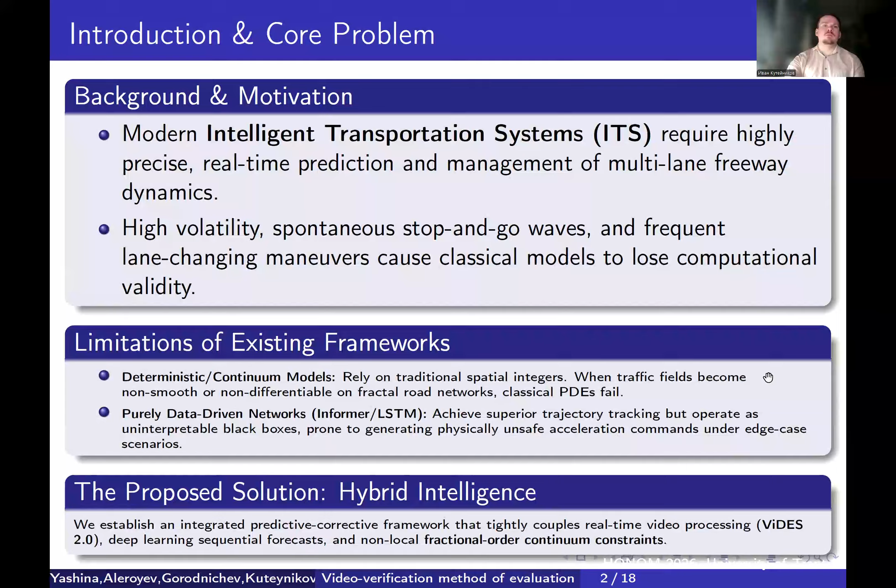On one hand, integer-order continuum frameworks assume continuous, perfectly smooth traffic fields. When deployed on fractal road infrastructures, they fail due to massive numerical truncation errors. On the other hand, purely data-driven black box models, like long short-term memory networks, achieve strong tracking accuracy, but lack physical interpretability. Under critical boundary scenarios, these deep learning systems are prone to projecting anomalous, physically dangerous acceleration commands. To resolve this conflict, we introduce a predictive corrective hybrid intelligence framework.

This slide illustrates the structural pipeline of our hybrid intelligence model. The entire operational loop executes within a strict sliding 10-second observation window, updated continuously at each discrete interval of 0.1 seconds. The architecture consists of three distinct phases. In phase 1, our virtual detector system ViDES 2.0 analyzes raw digital video streams to extract real-time macro-scale variables, specifically traffic density, intensity, and velocity.

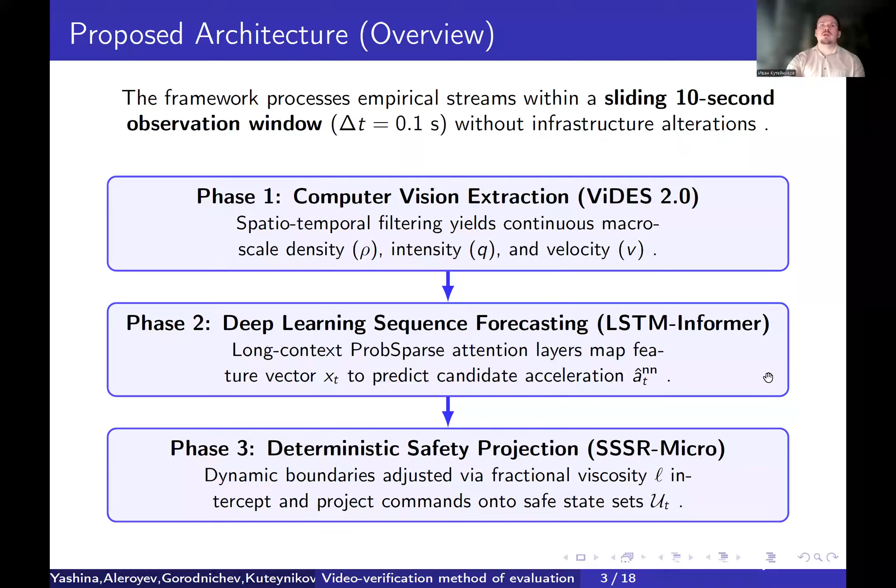In phase 2, these continuous parameters form a sequential state vector that feeds into a long context deep learning layer, combining bidirectional long short-term memory hidden passes and Informer sparse self-attention blocks to predict an unconstrained candidate acceleration value. Finally, in phase 3, a deterministic supervisor monitors this candidate output. If an anomaly or high-risk state is detected, the supervisor mathematically intercepts the command and projects it into a convex safe set governed by a macroscopic SSSR micro framework, which is dynamically calibrated using fractional cross-lane viscosity constraints.

First, an L1 matrix norm quantifies the absolute pixel intensity average across the target domain. Second, a zone variance function evaluates inter-frame motion fluctuations relative to the preceding frame matrix to track spatial transients. Once these matrix sequences are normalized, the output profile is binarized into Boolean activation signals using a data-driven adaptive threshold parameter. An activation state of 1 signifies absolute vehicle occupancy, whereas an activation state of 0 denotes an empty roadway zone.

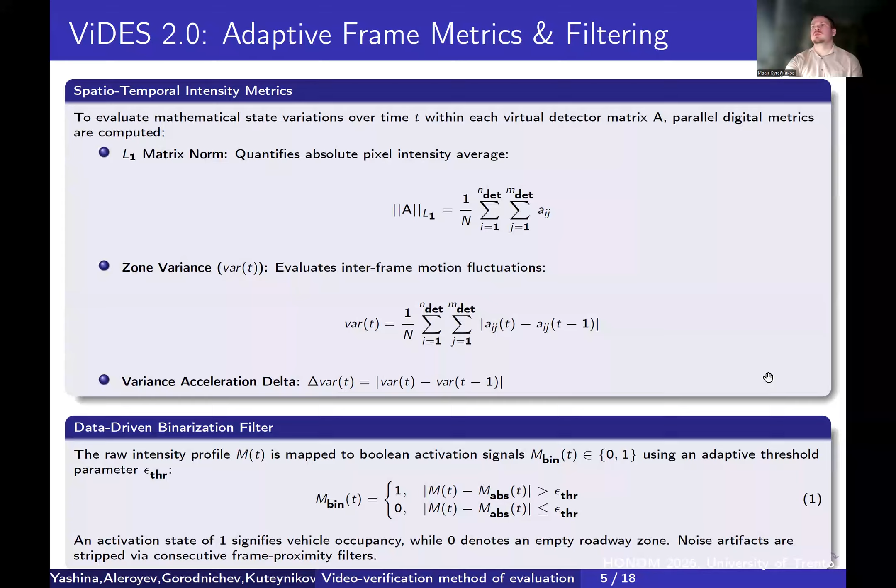Finally, consecutive proximity duration filters strip out environmental artifacts, shadows, and reflection noise, providing clean macro-parametric inputs for the next stages. We focus on how the binary activation signals from our virtual detectors are translated into traditional macroscopic hydrodynamic variables. This transformation is calculated over a calibrated spatial area.

First, traffic flow intensity or vehicle throughput is quantified by scaling the total vehicle count over a designated time interval to hourly volumes. Second, the average velocity of the stream is evaluated by tracking the precise frame offset duration as the vehicle crosses from the initial entry boundary to the exit boundary of the zone. Third, traffic density is computed by determining the continuous spatial concentration of vehicles over the calibrated area.

Finally, to make our framework adaptive, a real-time classification routine tracks individual pixel occupation lengths by evaluating data-driven frame occupancy intervals. The system automatically distinguishes between standard passenger cars and heavy trucks or buses.

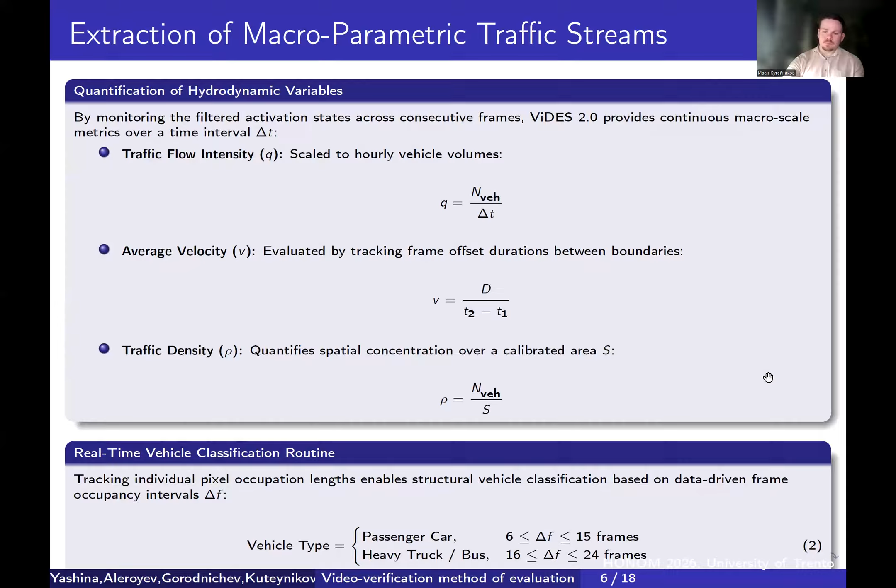This categorical split allows us to adjust downstream microscopic safety margins in real time based on current traffic composition. Now, let us transition to the second major block of our architecture, which introduces the fractional continuum modeling network.

As noted earlier, classical integer order hydrodynamic models assume that traffic fields remain perfectly continuous. However, under volatile highway transitions or near structural road bottlenecks, traffic density and velocity profiles become non-differentiable, causing standard partial differential equations to break down. To capture these non-smooth multi-lane flows without artificial smoothness assumptions, we reformulate the continuity equation on

Cantor sets. This is achieved by utilizing local fractional partial derivatives of order alpha, where alpha is bounded between 0 and 1. In this equation, ρ represents the fractal traffic density, while U and V define the longitudinal and transverse velocity components. A major mathematical advantage of this approach is that truncating the local fractional Taylor expansion yields exactly zero truncation errors, isolating our control loop from the linear numerical anomalies common in traditional simulation.

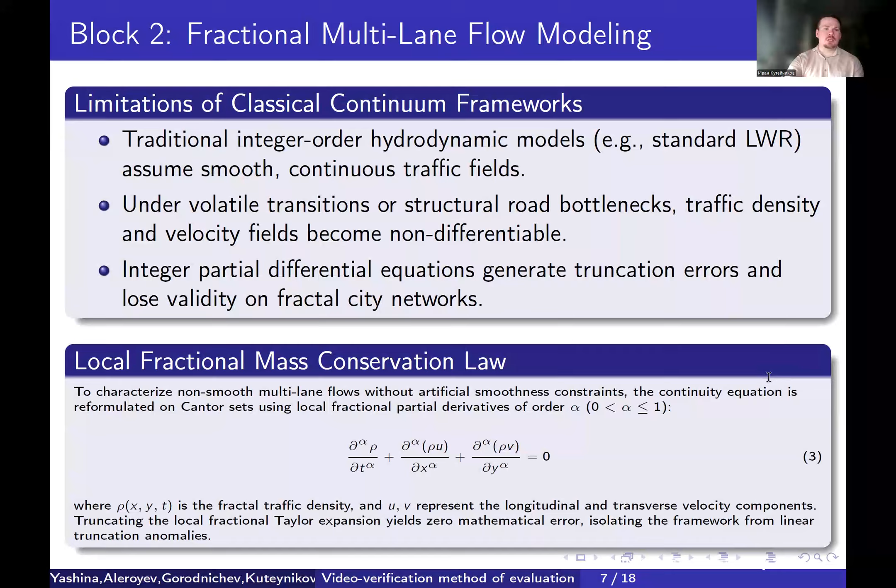We extend this mathematical foundation to describe the dynamic evolution of the flow velocity over time. To account for internal shear stresses and the complex rheological properties of dense multi-lane traffic, the momentum equation is formulated using local fractional operators of order alpha. Here the change in velocity depends on traffic anticipation pressure, a relaxation time constant, a longitudinal diffusion coefficient, and the

local equilibrium velocity field. The most critical and novel addition is the term ℓ, which represents the cross-lane shear viscosity. The friction and collective drag generated when the vehicles execute lane change maneuvers cannot be modeled using classical derivatives because they exhibit non-local spatial history. Therefore, we structure this inter-lane viscosity as a spatial fractional derivative of order sigma. It is scaled by viscosity coefficient kappa, which mathematically dictates the velocity synchronization rate across adjacent multi-lane streams during intense maneuvering.

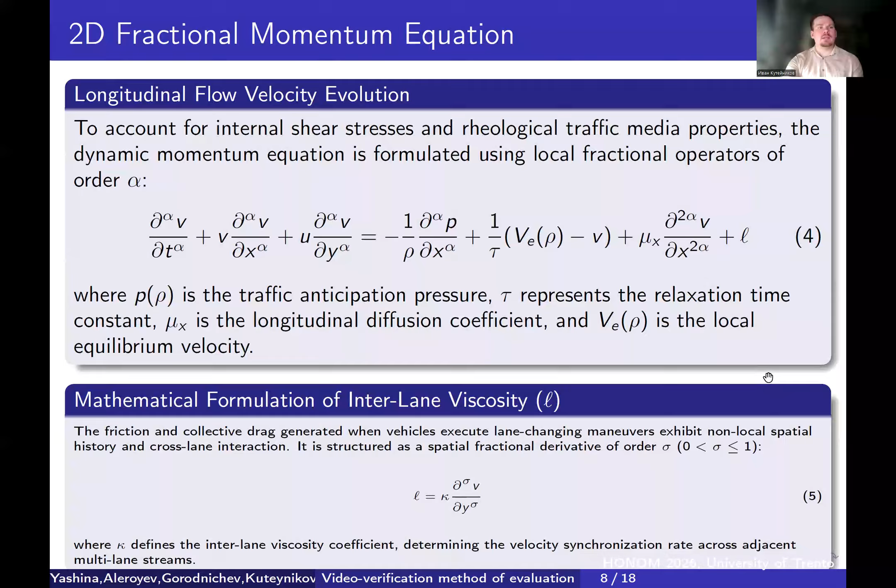While the full two-dimensional fractional hydrodynamic system is highly accurate, optimizing it directly within real-time control loops is computationally prohibitive. To resolve the operational challenge, we map the complex velocity perturbation dynamics onto an equivalent Bagley-Torvik fractional oscillation model. In this formulation, the variable c represents the instantaneous lane mean velocity deviation from the local equilibrium velocity, while the Riemann-Liouville fractional derivative tracks driver memory and hereditary lag.

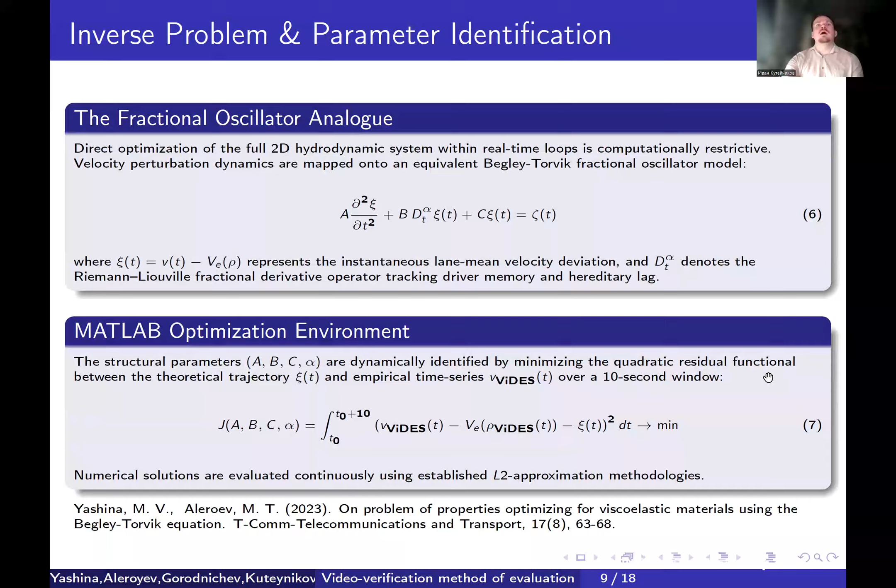To calibrate this model, the structural parameters, including the system coefficient and the fractional order alpha, are dynamically identified in a MATLAB optimization environment. The system continuously minimizes a quadratic residual function between the theoretical trajectory and empirical time series data captured by our video analysis system over a sliding 10-second window. This optimization ensures that our mathematical model mirrors real highway physics at every moment.

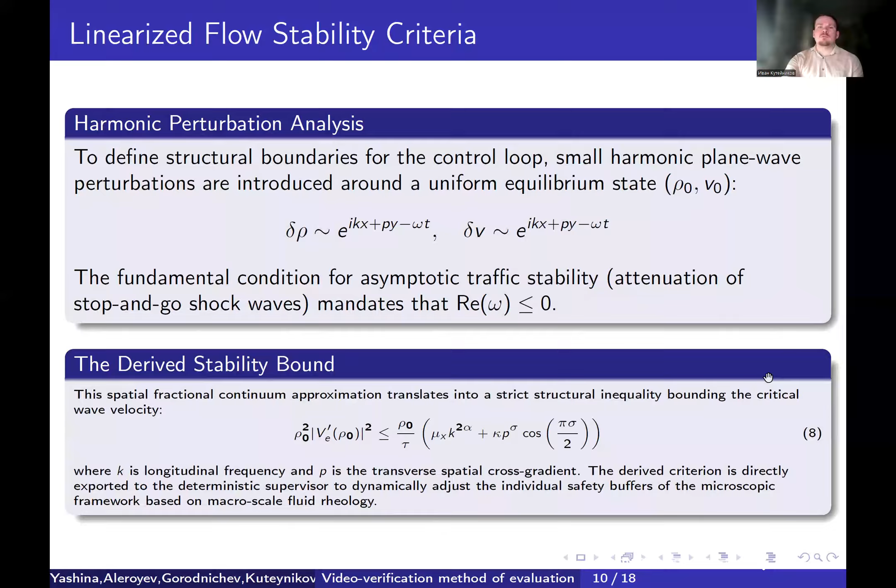By solving this perturbation system, we derive an analytical stability bound structured as a strict inequality. This bound dictates that the equilibrium velocity derivative is strictly limited by the relaxation time, the longitudinal diffusion frequency, and the cross-lane shear viscosity parameters. This derived microscale criterion is exported directly to a deterministic supervisor, allowing the system to dynamically expand or contract individual vehicle safety buffers based on the surrounding fluid rheology.

We look at the third major component of our architecture, the deep learning sequential forecasting loop. At each discrete interval, the localized multi-lane traffic state surrounding the target vehicle is captured within our sliding 10-second observation window. The state is formatted into an empirical feature vector containing 6 key variables: the current space gap, the following vehicle's velocity, the leading vehicle's velocity, the relative velocity delta, the bounded time headway, and the clipped time to collision indicator.

This dynamic feature sequence is then processed through a hybrid deep learning architecture designed to extract sequential variations and cross-lane dependencies simultaneously. First, a bidirectional long short-term memory network captures the chronological history of the hidden states. Next, these embeddings feed into an Informer block equipped with ProbSparse self-attention layers to handle long context sequences efficiently.

The final dense layer then projects this feature representation to output a raw, unconstrained candidate acceleration value. We explain how a deterministic safety supervisor governed by the microscopic SSSR micro framework intercepts and corrects the neural network recommendations.

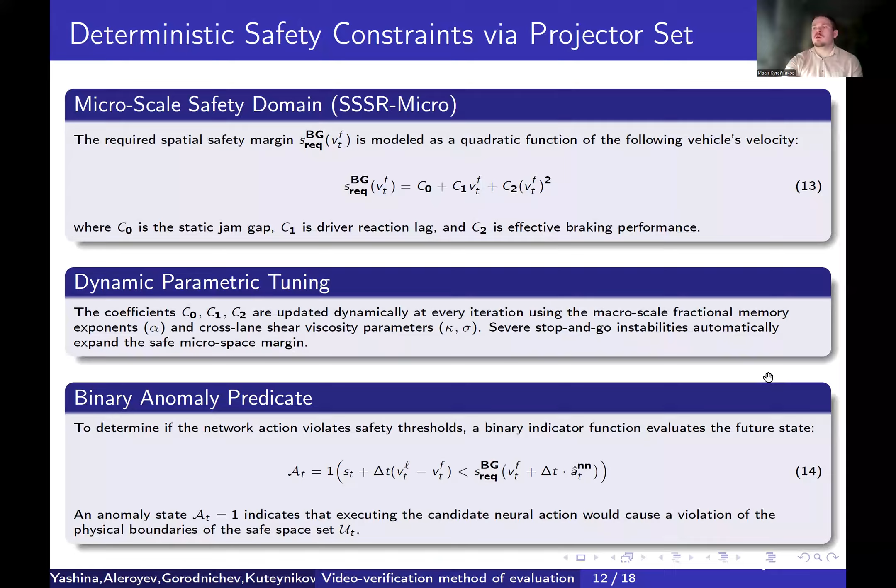If severe stop-and-go instabilities occur, the supervisor automatically expands the safe microspace margin. To verify safety in real time, a binary anomaly predicate evaluates the future state. If executing the candidate neural acceleration would violate the boundaries of the safe space set, the predicate triggers an anomaly state of 1, alerting the system to intercept the command.

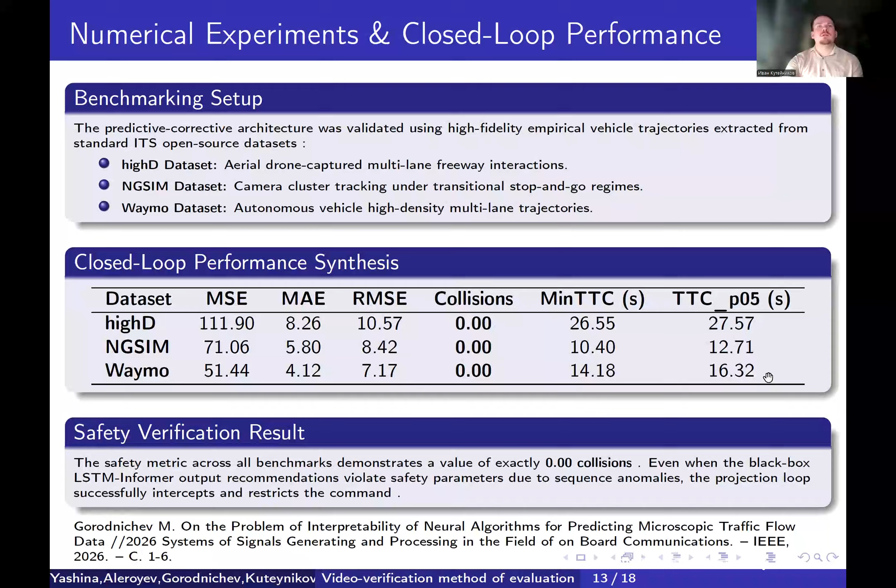The closed-loop performance synthesis proves the exceptional reliability of our model. Across the three benchmarks, the safety metrics demonstrate a value of exactly 0.0 collisions. Even in complex scenarios where the black box neural network generates unsafe acceleration recommendations due to sequential anomalies, the corrective projection loop successfully intercepts the command and restricts it to a safe operational boundary, maintaining an optimal balance between tracking precision and physical safety.

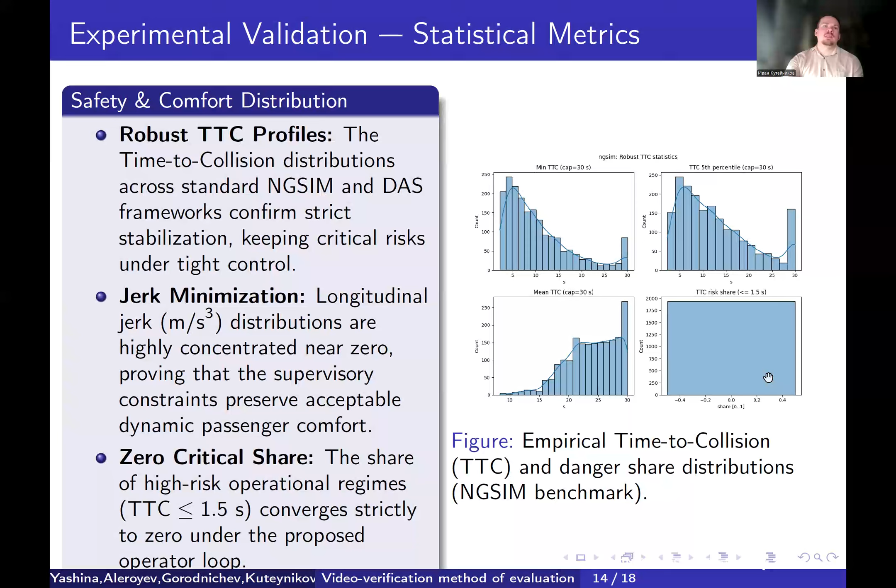At the same time, we must ensure passengers' comfort. The longitudinal jerk distributions measured in meters per second cubed remain highly concentrated around zero. This statistical trend demonstrates that our safety constraints do not cause erratic vehicle behavior. Instead, they smooth out transitions, proving that the supervisory loop effectively preserves acceptable driving comfort while guaranteeing absolute physical safety.

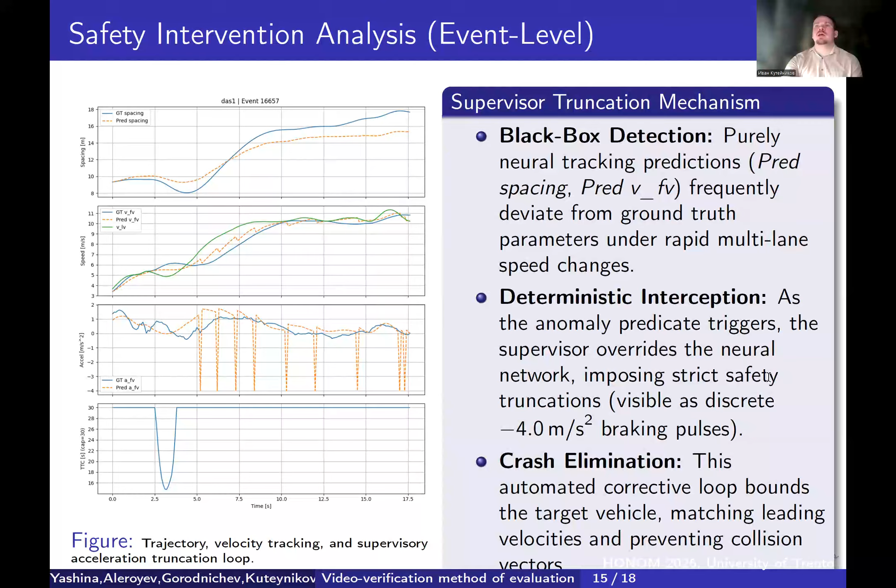The acceleration plot perfectly illustrates our supervisor's interception mechanism. The moment the binary anomaly predicate detects a potential safety violation, the supervisor overrides the neural network. This action is visible as sharp, discrete safety truncation pulses, dropping the acceleration down to a safe braking ceiling of minus 4.0 meters per second squared. This automated intervention forces the following vehicle to match the leader's velocity profile, stabilizing the time to collision metric and completely eliminating the collision vector.

In conclusion, let us summarize the primary scientific and engineering contributions of this research. First, our predictive corrective architecture delivers guaranteed operational safety, achieving a collision rate of exactly 0.0 across high-density open-source highway benchmarks. Second, by introducing a two-dimensional fractional momentum framework, our model achieves high physical realism, successfully capturing non-local driver memory and cross-lane shear friction to accelerate stop-and-go wave damping.

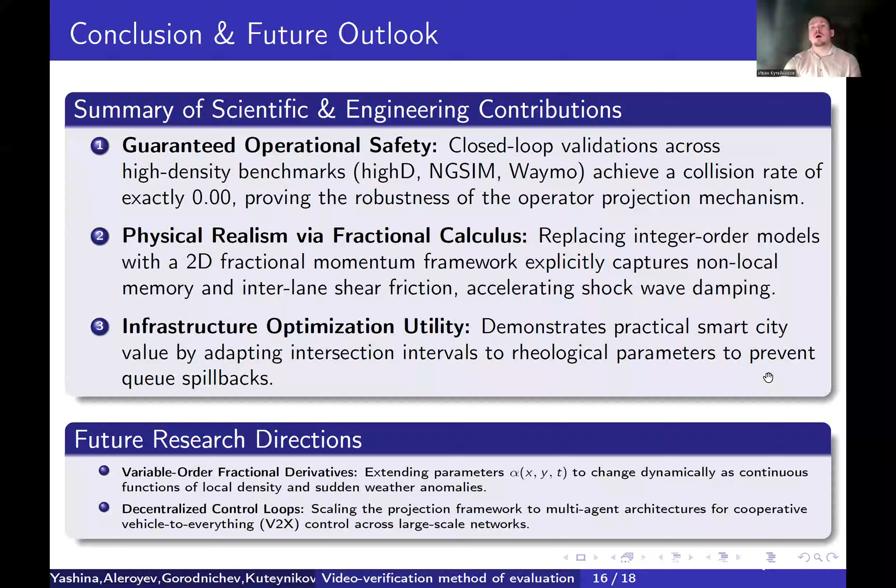Third, the model serves as a practical tool for smart city infrastructure design, helping optimize signalized intersection intervals to maximize corridor throughput. Looking ahead, our future research will focus on two major areas. We plan to transition to variable order fractional derivatives, where the order parameter can adapt dynamically as a continuous function of local weather anomalies. Additionally, we aim to scale this projection framework to decentralized, multi-agent, cooperative vehicle-to-everything control architectures for large-scale urban networks. Here you can see some of our published works.